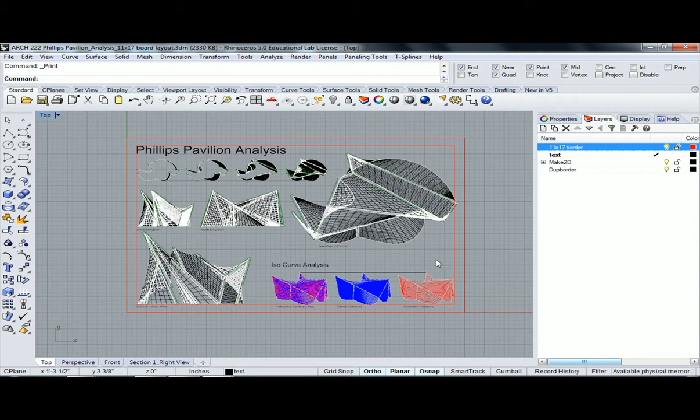Couple last minutes here, so I'm gonna do this real quick, and I might go into more detail next week to help you guys out once we make it this far on your individual projects. So I'm gonna run through this real fast.

One thing I'm gonna do first is I'm gonna go to my Make 2Ds, and I am going to change everything to black, except for the ISO curves I brought in, because I do like the red and the blue and the gray there. But anything else I'm going to change to black for now. One thing I am going to make lighter is, I'm actually just going to go ahead and turn off our hidden information. Maybe we don't need it for this diagram at all.

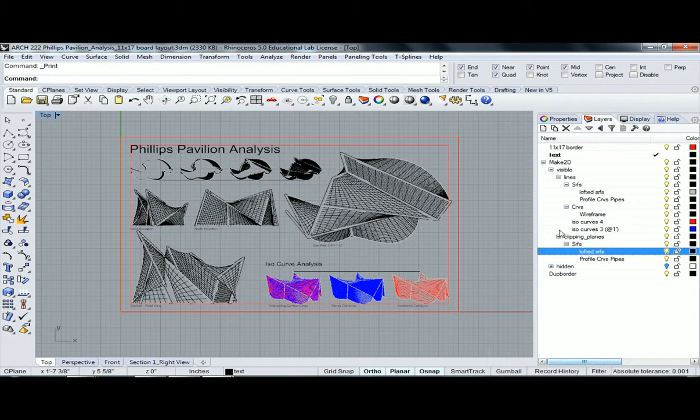Our profile curves are going to be black. Our lofted surfaces will make black as well. And I feel like I'm missing, okay, up here, wireframe. So the wireframe I'm actually going to change because there's a lot of lines there. So I'm going to change that to gray, so that way it's a little bit lighter of a line color. And then I'm going to change my lofted surfaces to black.

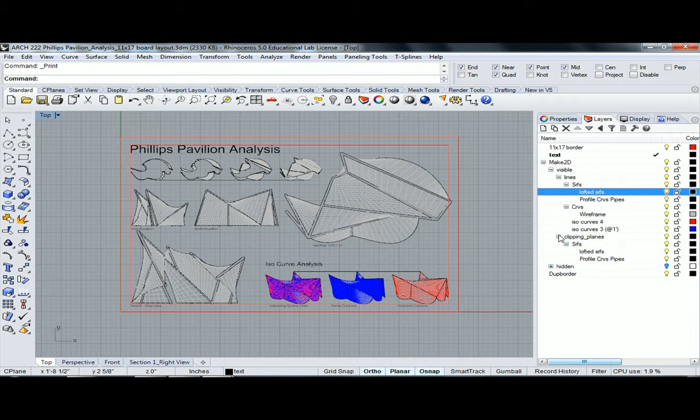So everything is black. The hidden lines are hidden out of sight. I turned off the light bulb, and so everything should read a little bit more uniform now when you're looking at it. And so I kind of have my board somewhat laid out right here. So now what I'm going to do is I'm going to print to a PDF.

So the way to do that is to go to File, Print, and typically it's probably going to give you the printer here, which I think was this one, and it's going to probably be something like that, right? And so it's on there, but it's not perfect. So what I want to do is I want to change some of these settings here. I want to print as a PDF, so I need to choose PDF as my setting.

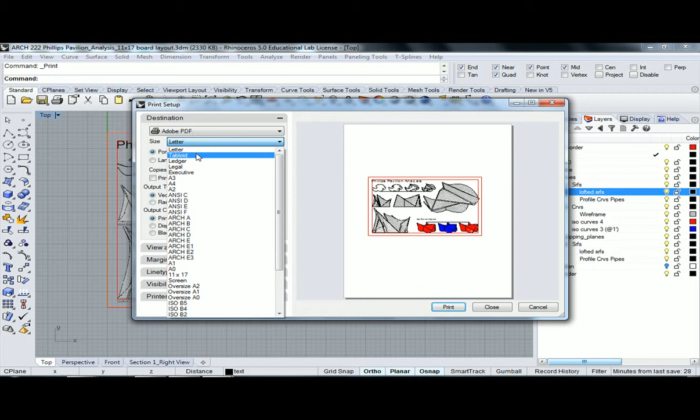I want to choose my paper size as 11 by 17 because that's what we drew it at. I'm going to change to landscape because we had it in landscape mode. I want my output to be vectors. Vectors means straight lines. There's not going to be any pixelation or anything. If you output it as a raster, you're probably going to come out pixelated. So like what Photoshop would do.

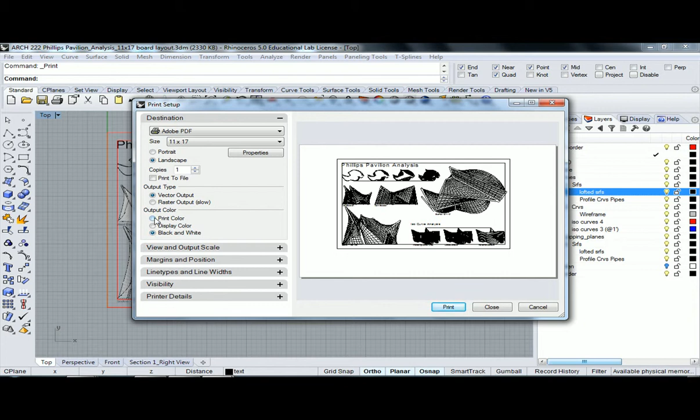Output, you do have the choice here of making it black and white, and it'll change everything to black and white. Since I had you change your layers here, I'm just going to keep it at print color. And then from there, one last thing we need to do is open up our view and output scale. We're going to choose the top view, but what we're going to change from viewport, we're going to change to extents.

So our extents are right there. And so now it's justified our drawing to this size. And then from there, I don't think we need to use anything else. I'm going to go to visibility. Okay, so one thing I'm going to do is close this out. I'm going to lock my border so that way it won't print that.

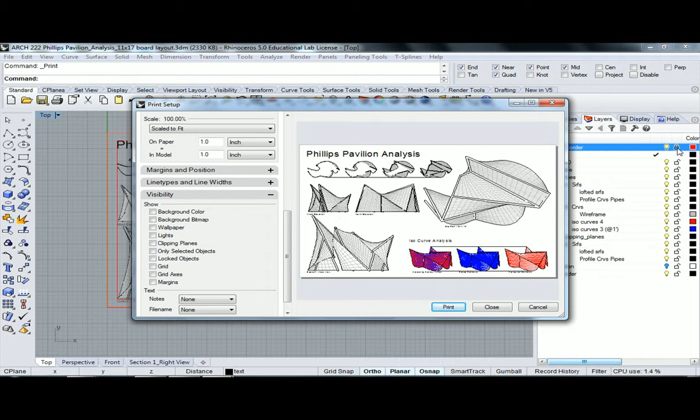I'm going to go back to print. All my settings stayed the same, thankfully. And what I'm going to do is turn that off so it does not show it. So since the layer is locked, I'm going to deselect that and it will not show that locked layer because it's locked right here. You can see it. And so it hid our border for us. And from there, I think we're good.

So I'm going to just hit print, and I'm going to save it because our name is already what I want it to be. I'm just going to hit save, and I'm only replacing it because I did a test version first. And now if we check it out here, I've created a really quick board, not even using Illustrator at all.

If there's time on Monday, I will go through doing this in Illustrator instead. But as for right now, doing it in Rhino, it's achievable. You can have it right here. And then if you go ahead and print this, which I'd like to real quick, so that way I can show you all what it looks like.

And let me get this printed and then I'll let everybody go. Right after I go grab this print. Give me 1 second.